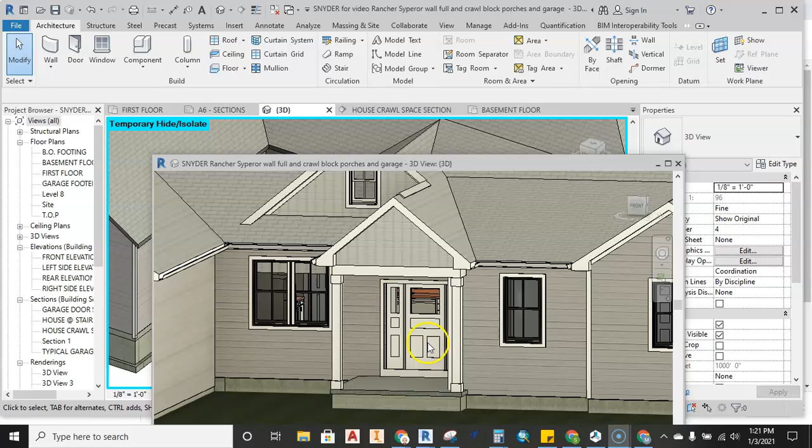Okay, in this video we're going to talk about how to add a roof to a front porch with some posts and add a few embellishments also. So let's go ahead and dive in.

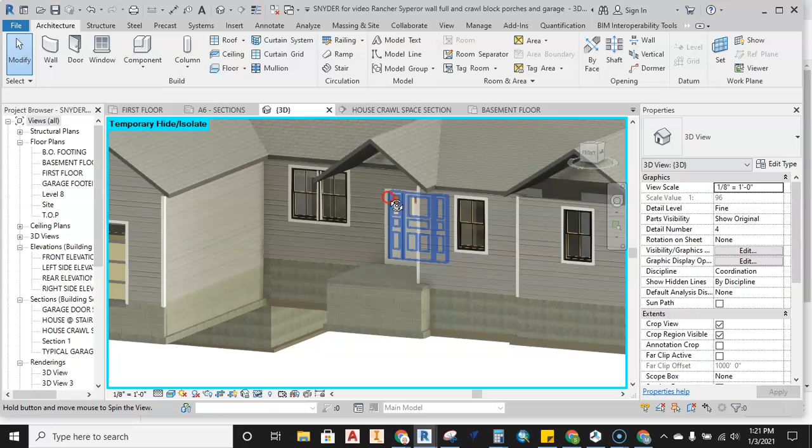Okay, so here you can see that we've got a front porch set up here where we do not have a post or a beam or a little wall here, a returned gable wall. So we're going to go ahead and add these features. So first thing we need to do is let's get some posts put in position, and we'll get a beam set underneath of here, and then we'll fill in this centerpiece here.

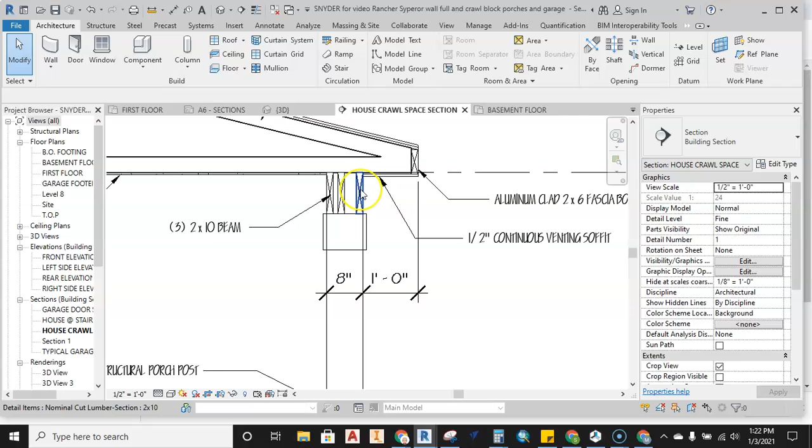All right, so first thing we need to do is understand where the beam goes and how tall the posts are. So let's go look at this section. This section view explains pretty much what all porches are going to look like on this particular drawing. The beam setting here is a 2x10 beam, so we'll go ahead and just get a measurement. The actual height of the beam is 9 1/4.

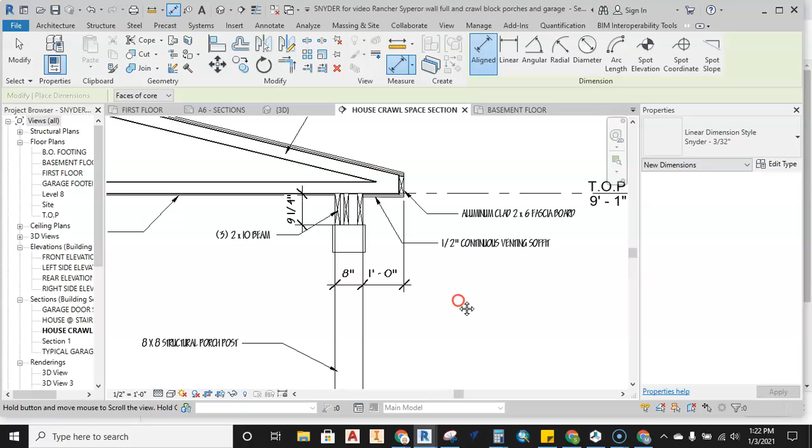So everything that we're going to be dealing with this beam or the top of the post is going to be based off of TOP. This is that top plate, and it's going to run down by 9 1/4. So with that information, we can go back out to the first floor, and we can start utilizing this porch as my edge for my roof beam.

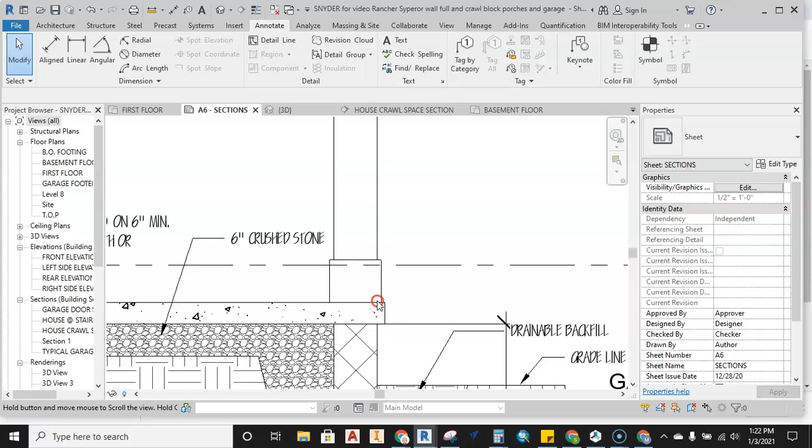Now, again, looking back at this, the edge of that beam is going to be directly in line with the front of the edge of the post. It's going to slide down. That's directly in line with the foundation. Okay, so we really can work off of that foundation to set this post in place, or we can also just get a measurement to work off of the slab.

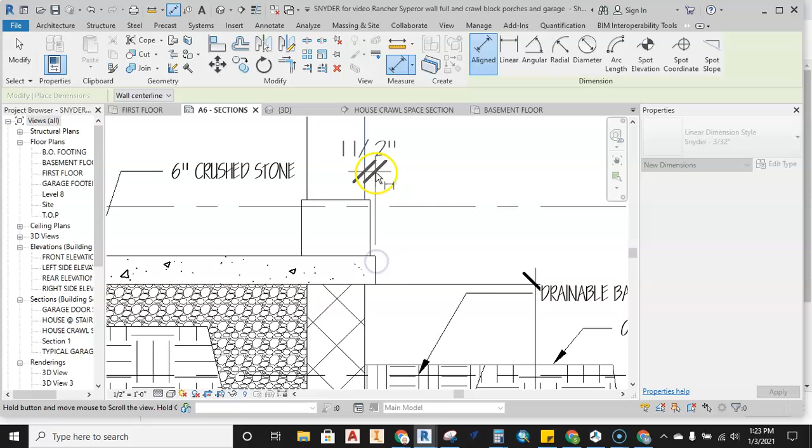So working from the face of the slab here, you can see it's 1.5 inches in. So we can do this in a few different ways, but let's go back here to first floor. I know that that post is going to be in both directions by 1.5 inches to set the beam, and that would then be in line with the foundation. So let's go ahead and let's go find that beam.

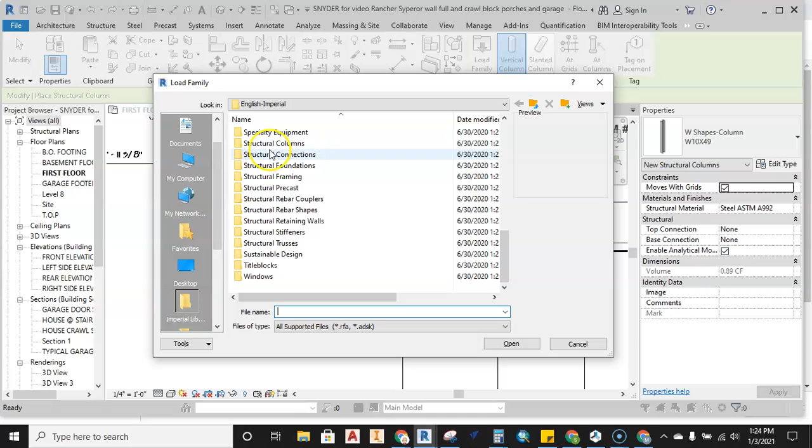We'll go into architecture. First, we'll actually go into structure. We'll go to column. Then we're going to make sure we're using a vertical column, and we'll go ahead and load the family. Looking down through here, we're going to find structural columns. We're looking for wood, and here timber columns, and we're going to find an 8x8. So there's the 8x8, and we'll start bringing that in.

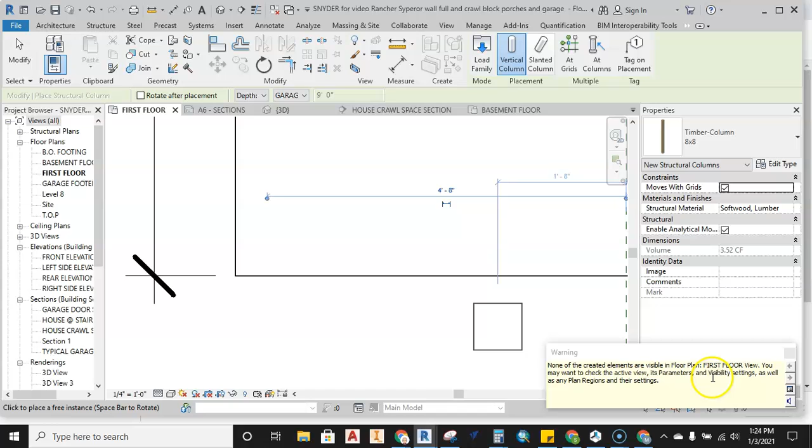Now, this is going to come in, and I'm going to go ahead and just set this in position right here. Once I put this in position, I get this error. None of these elements are visible, so we've got to go find where this element is. It's probably down below or being hidden somewhere, so we can go find it and see how to move it in place. So we'll go ahead and just grab a section view, and pull it across here.

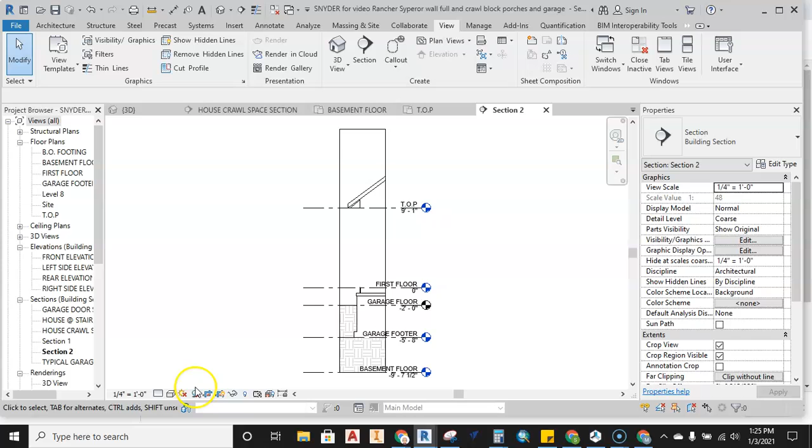So I know I'm slicing that beam area in half here, and then let's go see where the thing is going to end up. So let's go ahead and make this detailed. And there it is. So there's my beam dropped in below that first floor. That's fine. So we're going to take this and say I want this to go up to TOP, and I want this to be based off of that first floor.

So here we are. We're up at the TOP first floor. Well, I really want it sitting down here on my slab. So I'm going to offset this by 7 inches. So I'll grab that. I'm going to say base offset -7 inches. And then I really want the TOP base offset.

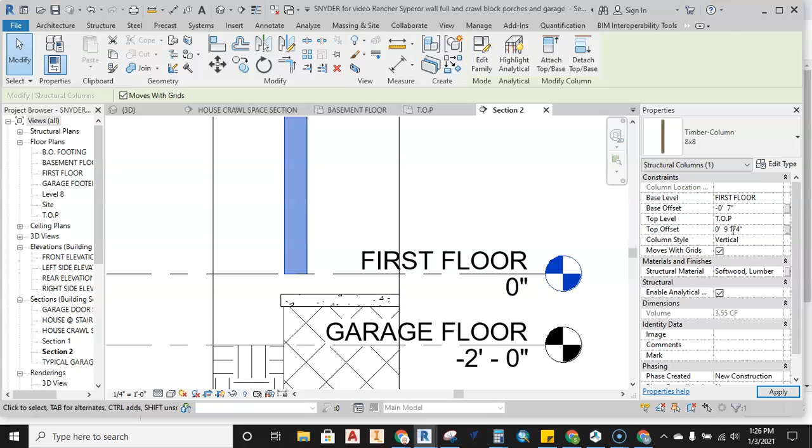That's going to be 9 1/4 inches, whoops, should be -9 1/4. That's going to seat itself down off of the TOP. That's where the beam is going to sit. Okay, so the beam's going to sit into that position. So now we're ready to go ahead and place the second one.

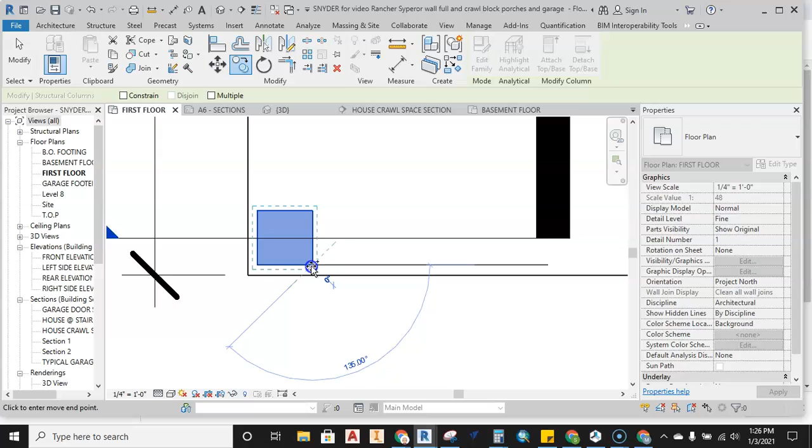I should be able to go back to my first floor here, and I can go ahead and grab this and then just copy it now that it's in the right place, and go ahead and stick it over here on this side of the porch.

Now, I want these in the right position because I'm going to base some stuff off of them. So I'm going to go ahead and measure to make sure I actually have the distance I want. So it's 2 1/4. I don't want that. I want this to be 1 1/2. So I go ahead and put that in at 1 1/2.

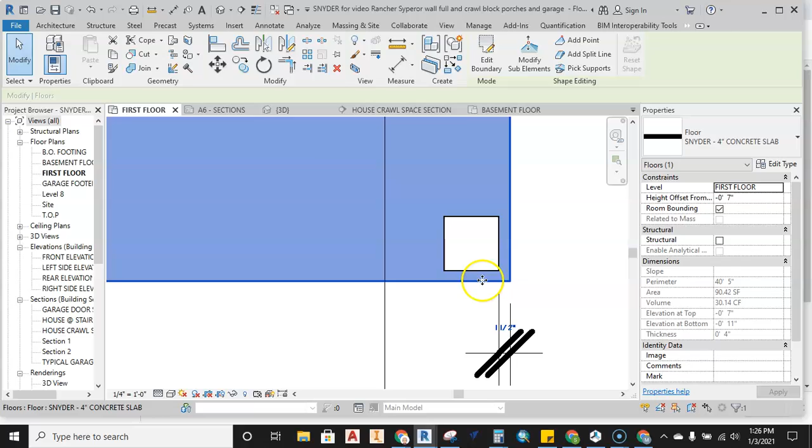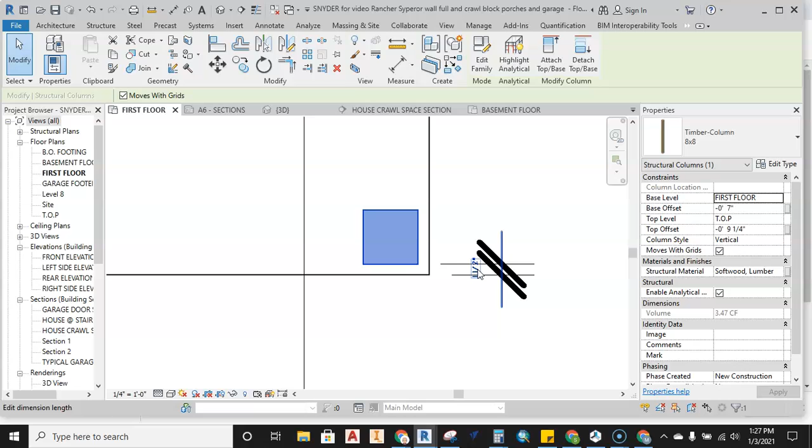And we'll go ahead and then just check the other side and make sure the other side is in alignment also. Well, that's 1 inch and we don't want that. We want 1... There we go, 1 1/2. There, it jumps it into position. Okay, so that should be good. Come over here and just double check this one also. So you can see I went ahead and dropped some quick dimensions on here and moved them into position. So that's right in the right position, and so is that one.

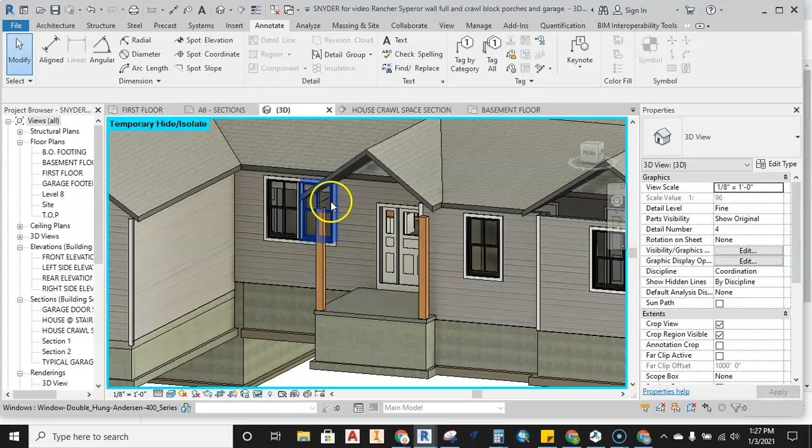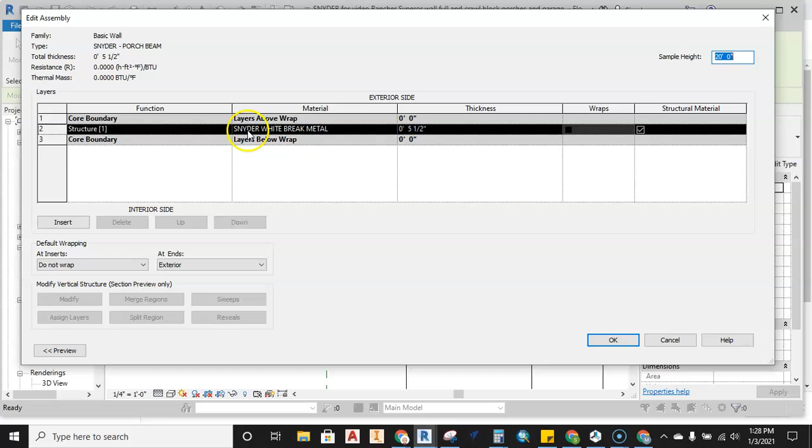So now what I'm able to do with the beams in position here, those two front posts, is go ahead and create a beam that's going to run on top of that. So go ahead and work off of that. I'm still going to be working off my first floor though. All right, so I'll grab a wall, because the beam is actually just going to be a wall that is named porch beam. So within this porch beam, if I go in and look at this, it's basically just white break metal as the material that's going to be shown on the outside, and it's 5.5 inches thick. So that's how thick this beam is set to be.

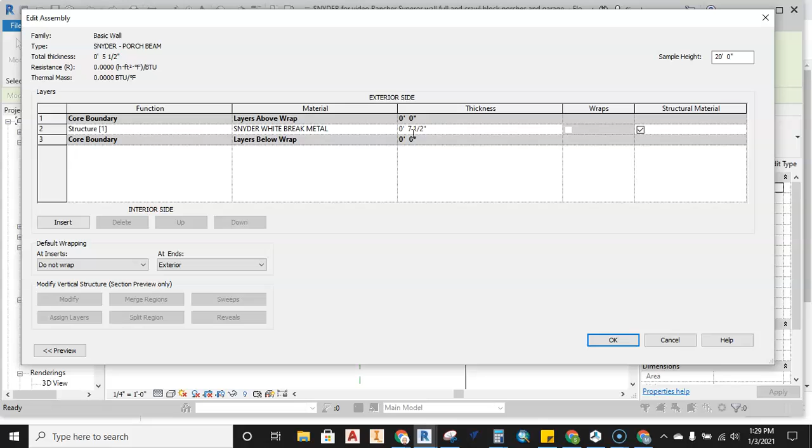And in fact, because it's a smaller beam size, we can go ahead and set this up to be that 8-inch beam also. That 8-inch beam is not actually going to be 8 inches. It's going to be 7.5 by 7.5. So let's go ahead and say thickness is 7.5. Hit OK, hit apply, hit OK, and now we're ready to run that beam.

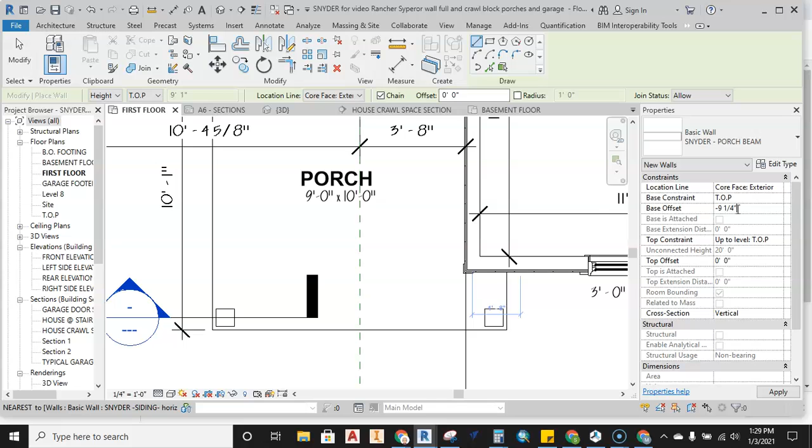But I want to go ahead and set this up so that my base constraint is TOP, and then I'm going to set this down. So my base offset is going to be negative 9.25. So it's sitting down off of that top base. So here we go. We're going to go ahead and draw across from one side to the other. Of course, it says we can't see what's happening here. Well, it's fine because I know it's happening above. So then we go back to my 3D, and it should be drawing on top of those posts, as you can see here. All right, so that seems like it's working out.

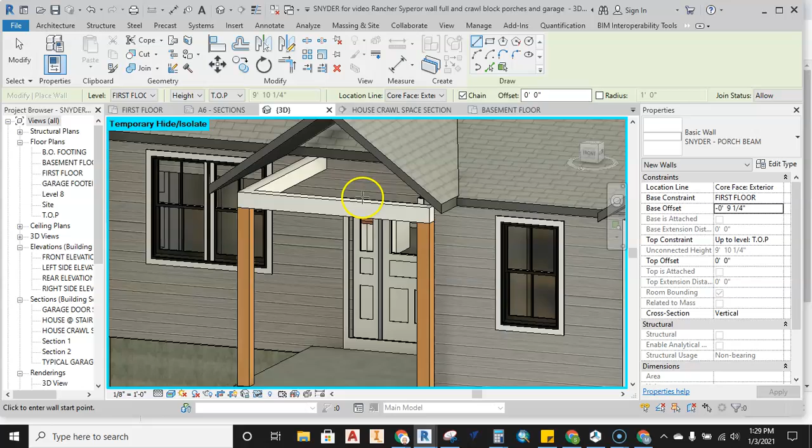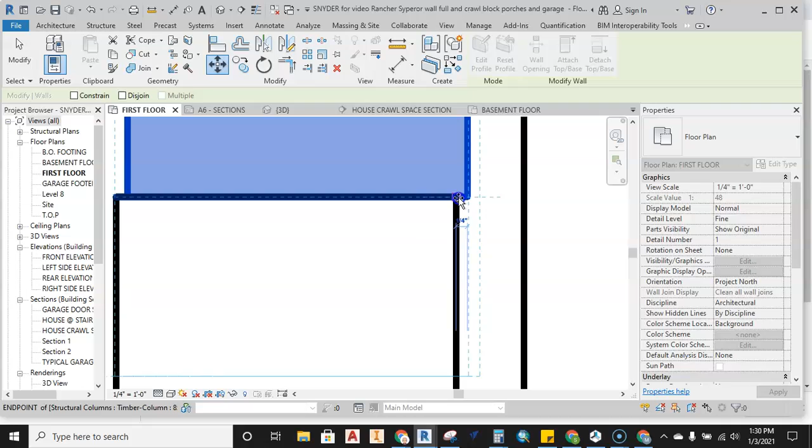We've got to get one more put in position here. So I'll go ahead and align this and just draw that beam. Oh, looks like it's running to the outside just a hair. But what I can do is drop it into position here. Go ahead and grab it, and then just scoot this over to the inside there. All right, so now put this up on TOP, and then it'll go ahead and disappear. And now I am looking at my 3D, and you can see I got a beam running around it. All right, well, that's all good.

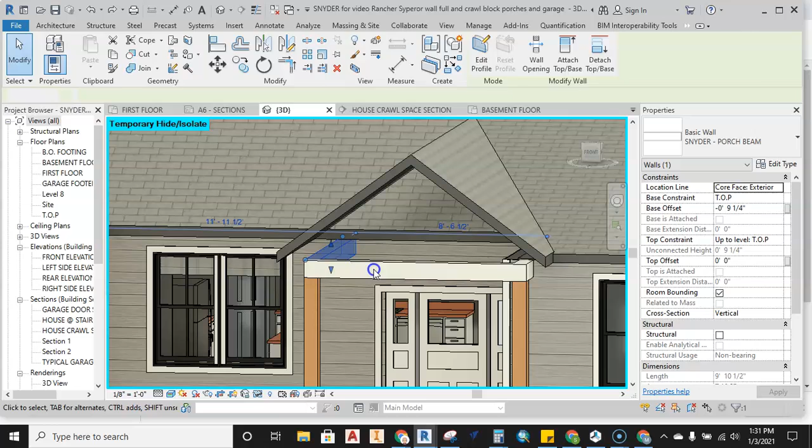Okay, now we're ready to go ahead and take this beam and run this up to the roof. Now, we'll go ahead and select the beam, and it really doesn't matter a whole lot back in here per se, because these are going to get hidden anyway underneath the soffit and the fascia, but this front one's definitely going to be seen. So we'll go ahead and do this. We're going to hit this, and we're going to say attach to the roof, and it runs up and is going to be all white.

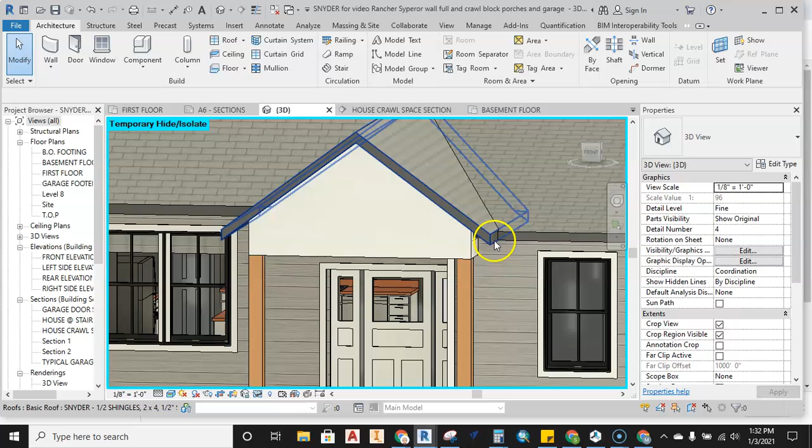Now, obviously, we don't want a full white face up here. This is where we can add some embellishment to this by splitting this element. Okay, so before we split this element, what we should also be doing here is setting up some soffit, I should say some fascia, to see just how far down this edge should get covered up.

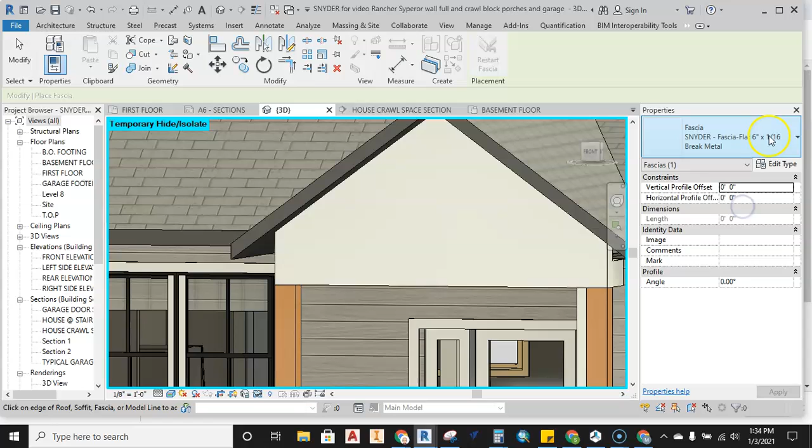Okay, so to add fascia, we come up here to our roof tool, grab this button that says fascia, and what I'm going to do is go ahead and already grab my 6 by 16 inch break metal fascia. That way it'll be white. I've already gone into set this up where I've gone into the fascias and I've set that the material is now going to be based off of a material that was built that's just called white paint. Okay. Because I want this to be a nice clean white fascia.

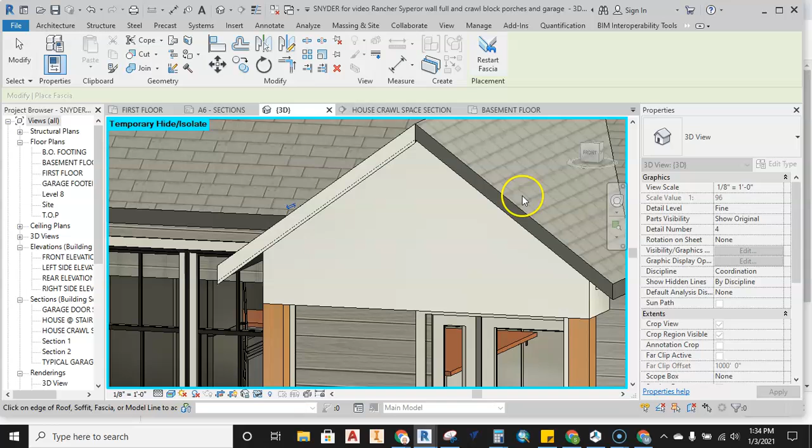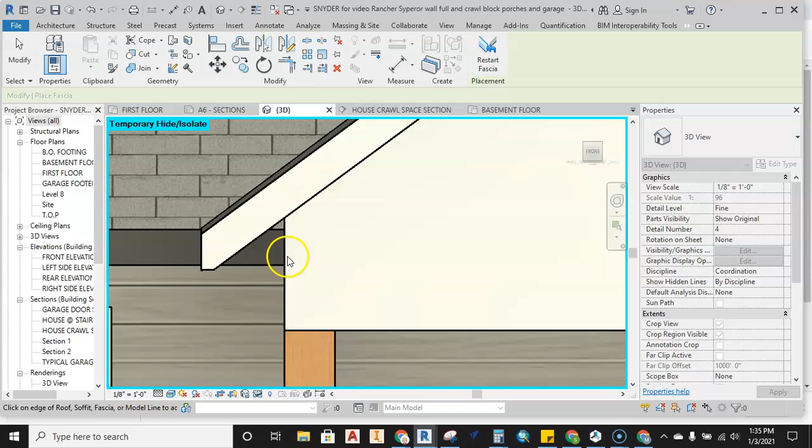So when I come through here, I'll go ahead and grab the edge of the top of the roof here and grab the edge of the top of the roof, and I can even run that fascia back against the house there. Now, what you're going to notice is that that fascia kind of cleans up. There's a nice clean edge here now, zoom in on that, where it's flat. What that fascia does is that sets up where the bottom of what is called that bird box return on underneath of the soffit is placed.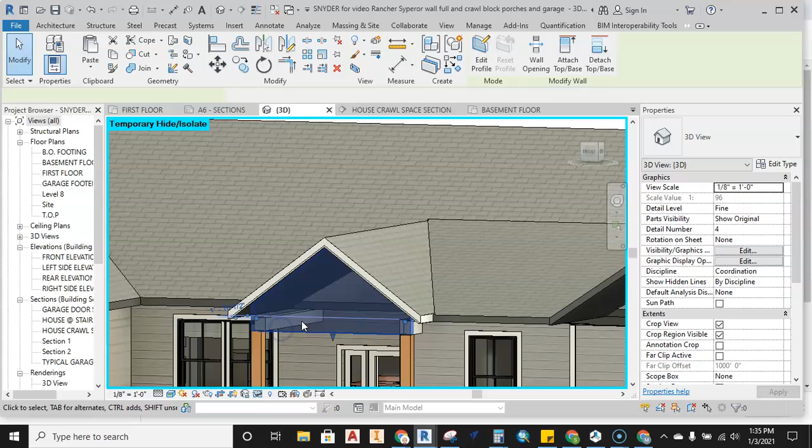And then we're going to go ahead and work off of that line at that point for splitting this front element here. Okay, so that we can then change this front face. So with that all set and good, we can go ahead and set up this split face. So what I'm going to do is go ahead and just turn and look at this so I can see it straight on. And now I want to go ahead and split that face. With that selected, I come up here to the split face tool. I go ahead and I select the split face tool right here.

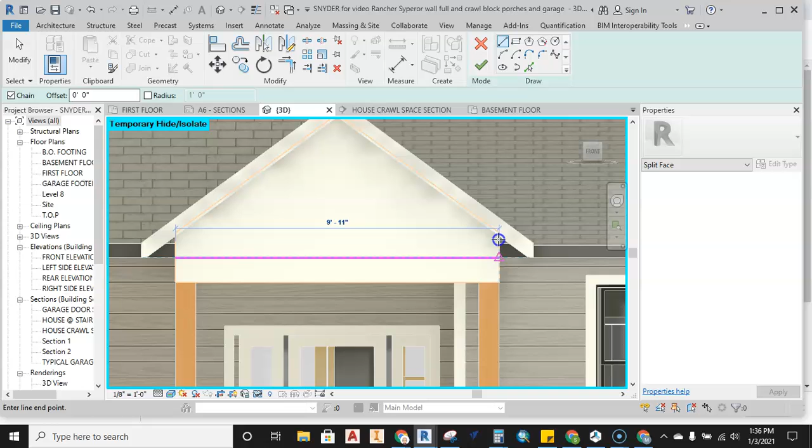I'm going to go ahead and select what I'm going to actually be splitting. And then I need to draw the geometry of what is going to be different. Okay, so I want to make sure that I'm going to work from this edge. So I'm in line. I'm going to go ahead and draw across, go up, back across here, and then back down. Okay.

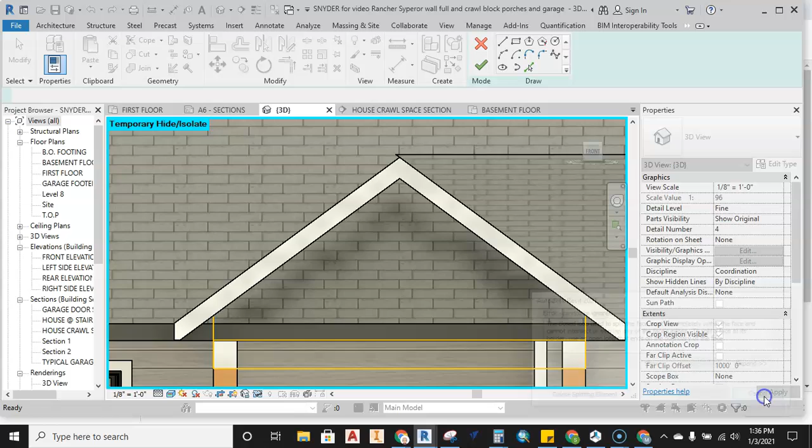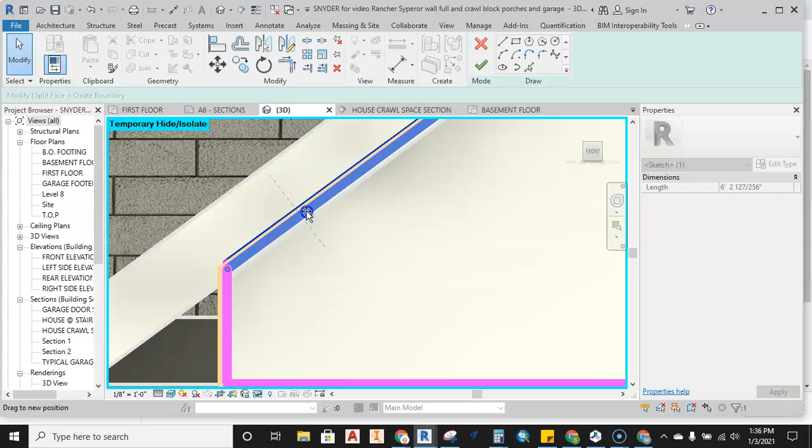Now, it says the closed loop used to split the face must lie completely within the face and cannot intersect or overlap any of the edges faces. So what that's telling me is this has got to be scooted in because it's a little bit on the outside. So I'm just going to get it as close as I can here to the outside edges of this particular element, which is a wall. And then we'll go ahead and hit OK and make sure this is going to work for us. Okay, so now we have a split element.

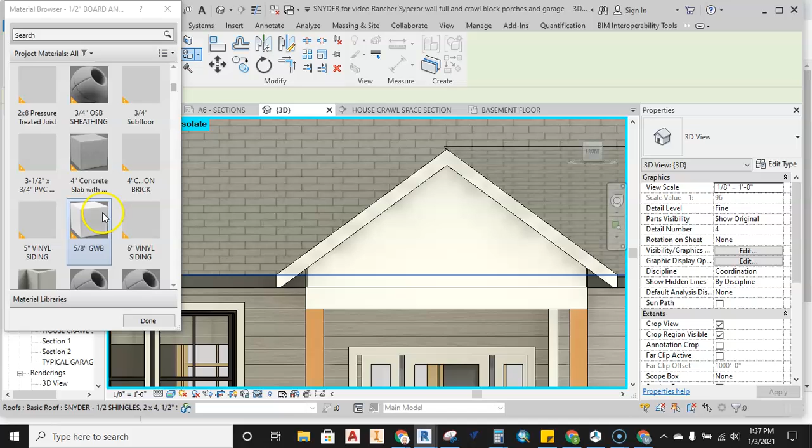So I can now apply another type of material to this edge. So I'll come over here to my materials, which is my paint tools here. I'll go ahead and select those. Then I can go in here and pick whatever material I want to apply. Well, I can use this vinyl siding, or if I wanted to go in here and find something else that I wanted to apply to this area to embellish this a little bit more, I could do that.

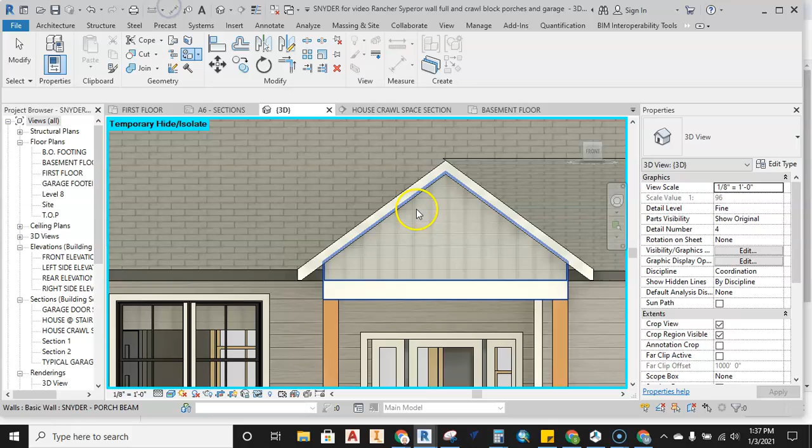Let's just see if I have any board and batten siding in here. So what do we have here? Board and batten siding. Let's actually select this and add it to this piece here, and then we can close out of that. So you can see that we can change this up a little bit, so it has a little bit different vertical look to it for the front porch.

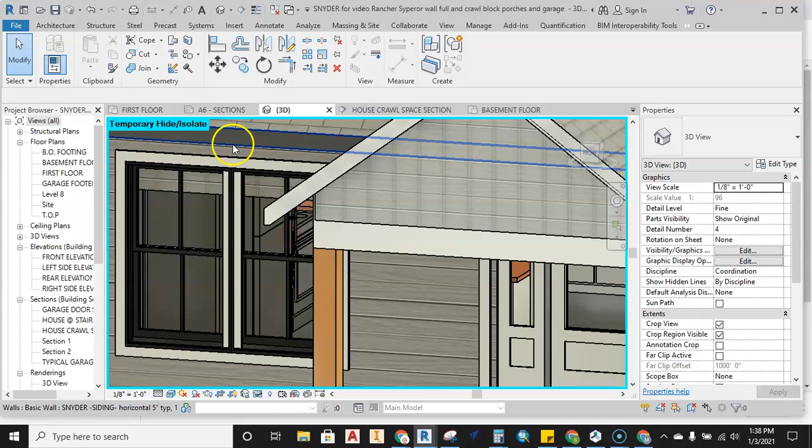Okay, the next thing we'll do is we're going to go ahead and add in some of that soffit and the bird box to the front porch to finish off this detail here. So to first start, what we're going to do is we'll go to that TOP level so we can see where that soffit's going to end up. And what sometimes gets tough to see is seeing through this roof at this particular time to see what's happening underneath it here.

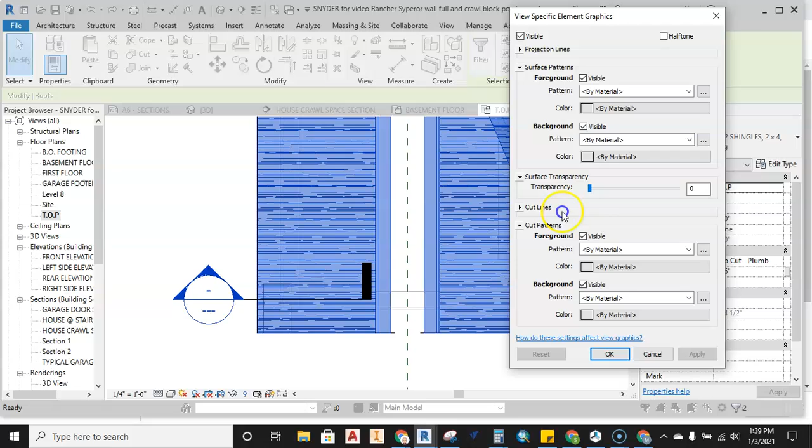So what I usually like to do at this point is I go in and I want to override some of these graphics. So I don't want to see any of these surface patterns because that makes it a whole lot harder to see through. So I'm going in and turning that stuff off. Then what I want to do is I want to go back to architecture, roof, and I want to find that soffit. Okay, so this is where we're going to add soffit to our roof.

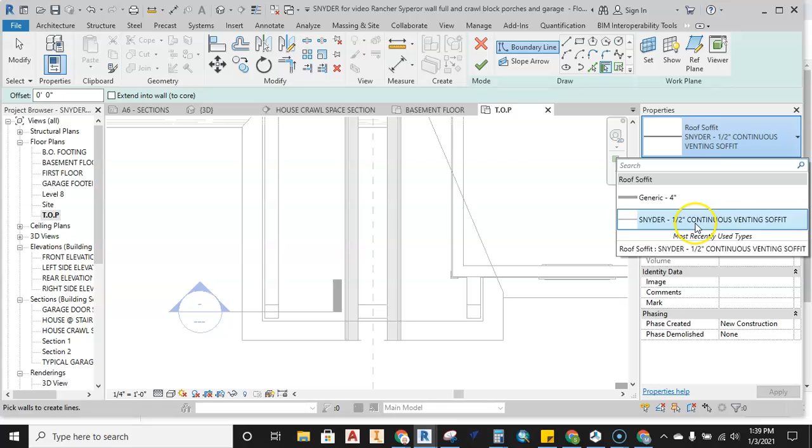And here I already have a 1/2 inch continuous vented soffit built up. Pretty simple to take your generic, edit the type, you can duplicate it, rename this to be whatever you want it to be, and then you can go in and set the thickness here to be 1/2 inch, and then call out whatever material.

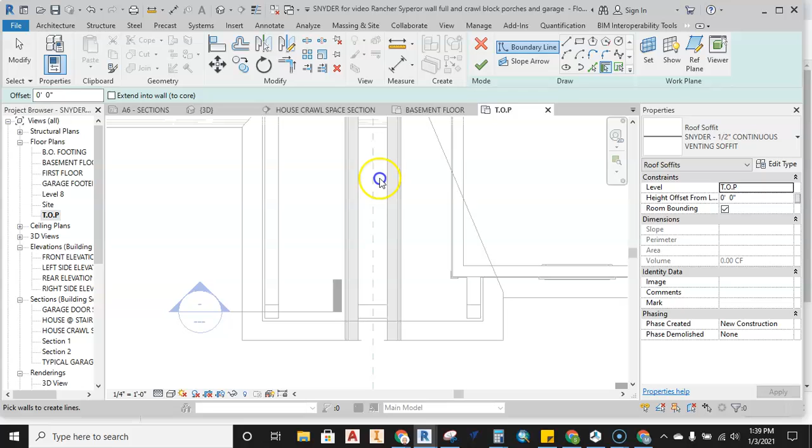Very similar like any other Revit material build up. So we go ahead, we have this continuous vented soffit set in position, and I always usually just grab this rectangle tool, and then I come to this point. I know it's going to line up directly with this beam, so I find that point, find the front edge, and I like to pull a rectangle all the way back to the house like this, or I would pull to the roof.

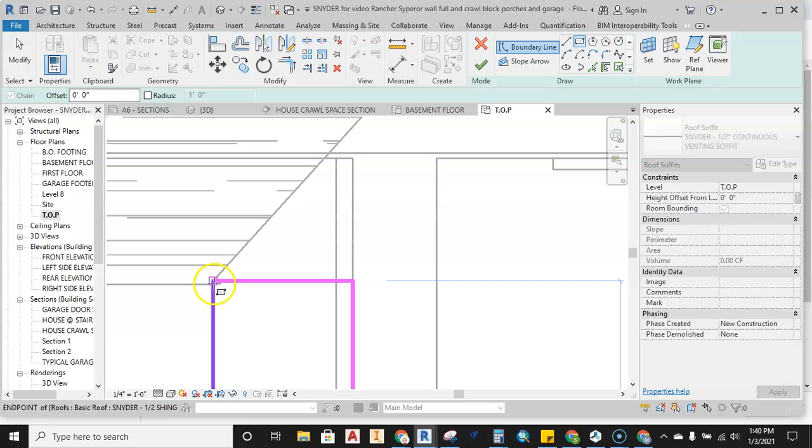Doesn't really matter which one I run to at this point, because I'm going to end up filling in the other side shortly anyway. So we'll go ahead and we'll pull to the house on this one. Okay, so with that set, now this is still also base TOP, so I'm going to go ahead and do this as a -9 1/4 inches also.

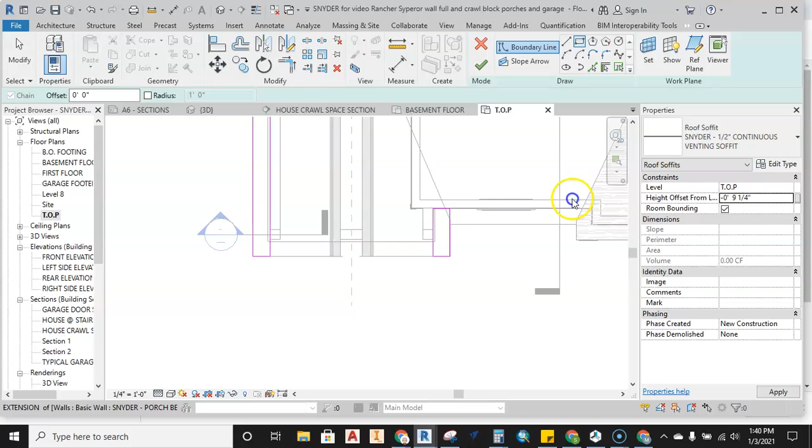So now let's go back out to the front, see what happened here. So there's my soffit, and that's sitting down here. In fact, it doesn't need to be the bottom of this beam. I'm sorry, that can be up a little bit higher. So let's go find out exactly what that height's going to be. I think it's probably going to be like 6 inches. Probably going to jump right up there. No, not yet.

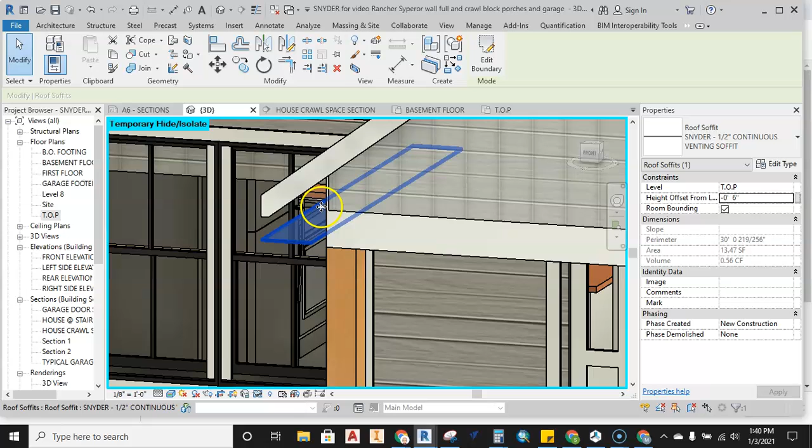So let's get an actual measurement because I want this to be up here. Oh, you know what? It probably is going to be 0. Yep, it is. It's actually going to be based right off that TOP. So now we have that set in position. That's the soffit. Now we just need to fill in this little corner piece.

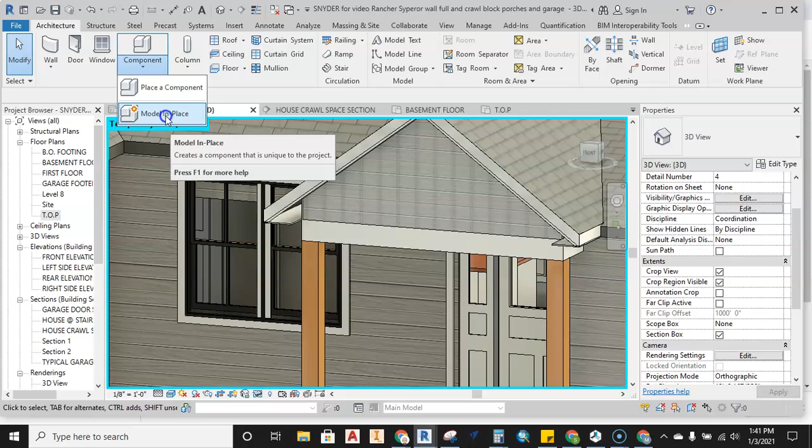So to do that, we've got to come to component, and what we want to do is called model in place. So we're basically going to do an extrusion. So we'll click model in place, and I'm going to come down and just base this off of my roof structures. And it comes up roof 14. I'll call this bird box 1, just to name it. And now I'm ready to start creating this bird box.

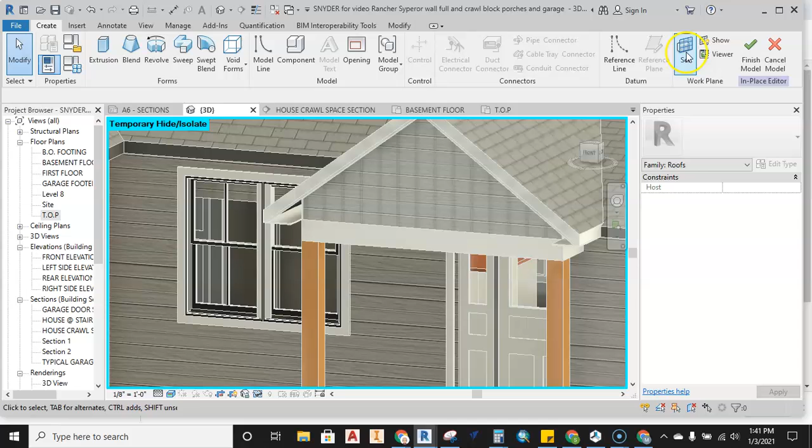So I want to set my view plane or set my work plane. So I hit set, and it's going to say pick a plane. I want that. Hit OK, and I want to base it off of this fascia. So I'm going to slide over this fascia. I'm going to select the fascia. I'm going to grab my extrusion tool. Then I want to go ahead and just look at it straight on. So I want to definitely see the house straight on.

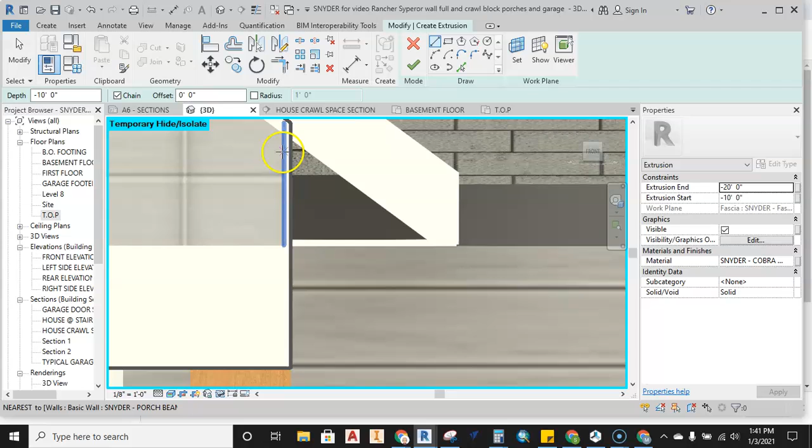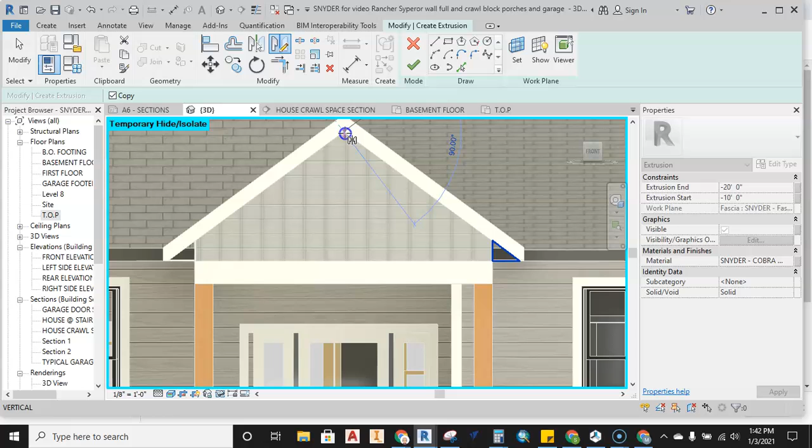And I'm going to draw in 2 closed loop extrusions. So this is going to go from here to the point on the wall that is going to link up with the roof. Okay, so I'm going to do it on this side. And then I always like to use this mirror tool where I'm going to highlight this, and I'm going to select my mirror line and draw straight down through the middle of the part, and then it mirrors to the other side with the geometry that I just drew. So now with that set, that's in position.

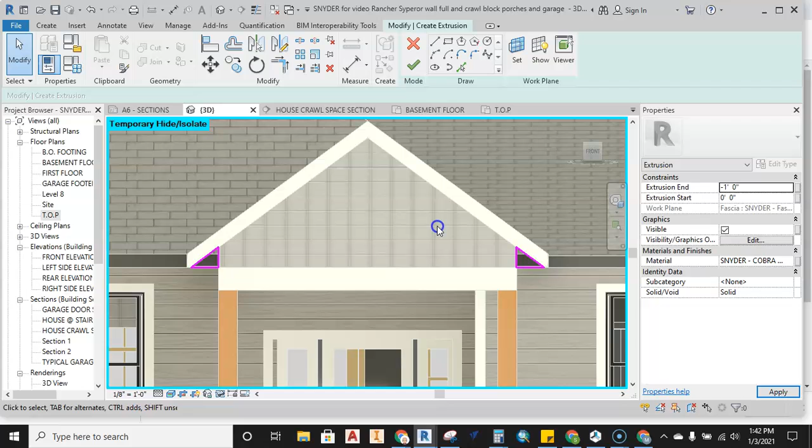Now we'll look over here at my extrusion start and end. Well, right now my start doesn't need to be at negative 10 feet. My start can be at 0, and then my overhang is a foot. So I'm going to go ahead and say negative 12 inches. Now, what that's going to do is it's going to then allow me to have an extrusion push back into the house here by 12 inches.

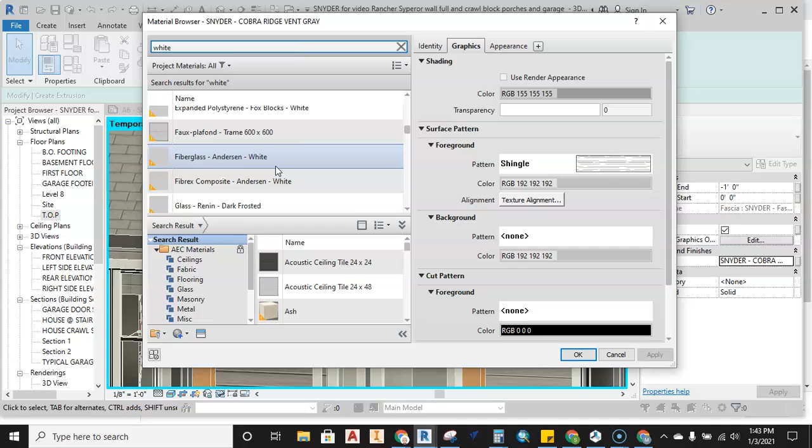Right now, it says material. This is set up for, looks like ridge vent, and I don't want that. I want white. Going to end up using some brake metal here because that's the same white trim or white paint that I'm using anywhere else in here. So let's see, where do I have this? Continuous white metal soffit, white brake metal, we'll use that. Hit OK. And then we're going to go ahead and hit the green check.

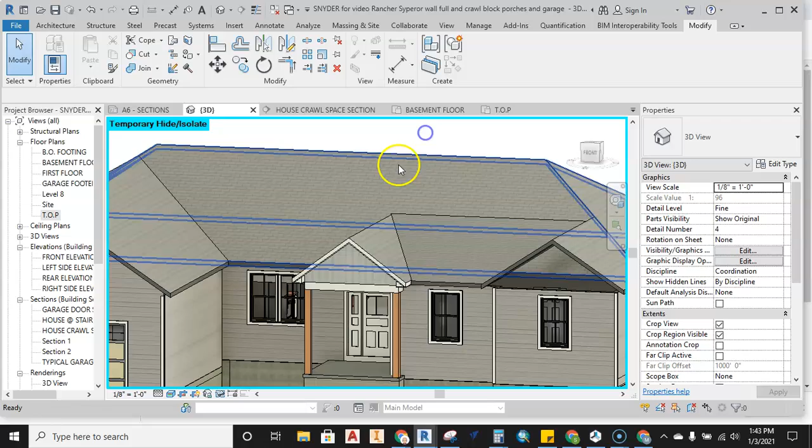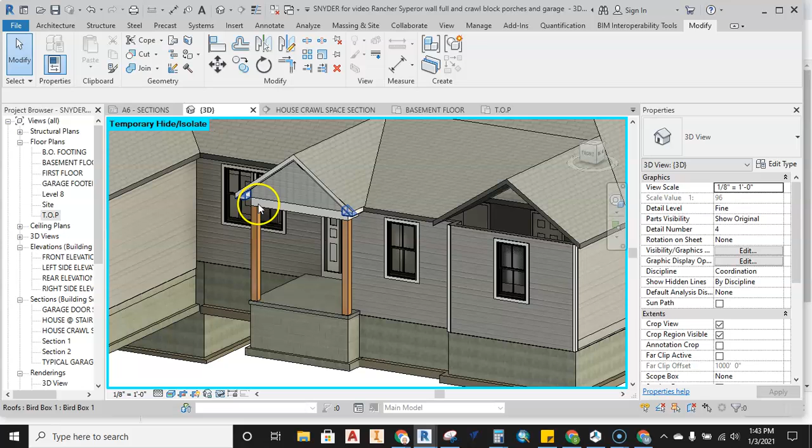Now, what that has just done is it's gone ahead and finished the model. It's gone ahead and built in these little bird box returns, okay? This is a slightly tedious little process to do in Revit, but it does end up making your model look a whole lot sharper when you want to get into the finishing aspects of a drawing. So hopefully this helps you work through some of those details for setting up your front porch.